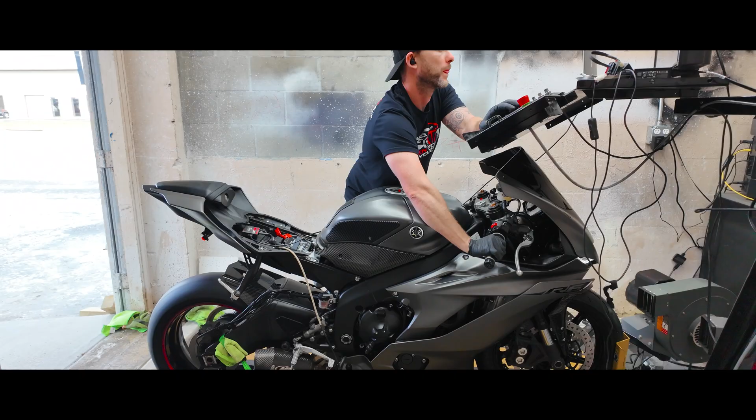Today we have a 2019 Yamaha R6. This bike came to us from another shop. I believe it has a full M4 system, and I'm pretty sure it's got an air filter. These bikes have a little restrictor in the air box, so more than likely they took it out. I'd be very surprised if they haven't already.

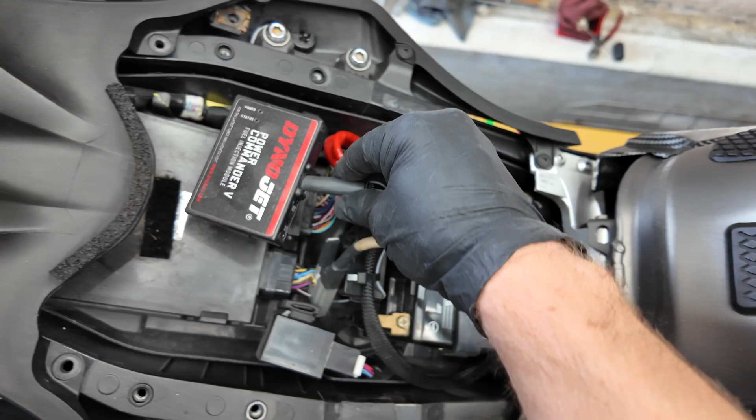So what we're gonna do today: we're gonna dyno it, flash it, and tune it. It's got a Power Commander 5 sitting up here — I just have it out of the way for the pickup. I don't know what the Power Commander 5 mapping looks like inside, I haven't looked at it yet. So we're gonna flash the ECU and tweak this Power Commander, kind of dial them in at the same time.

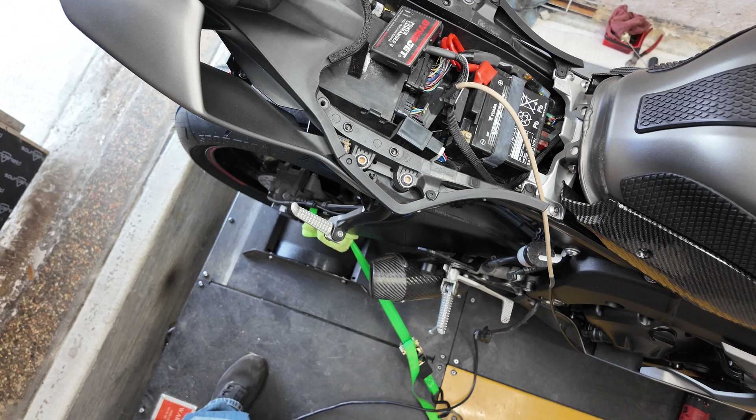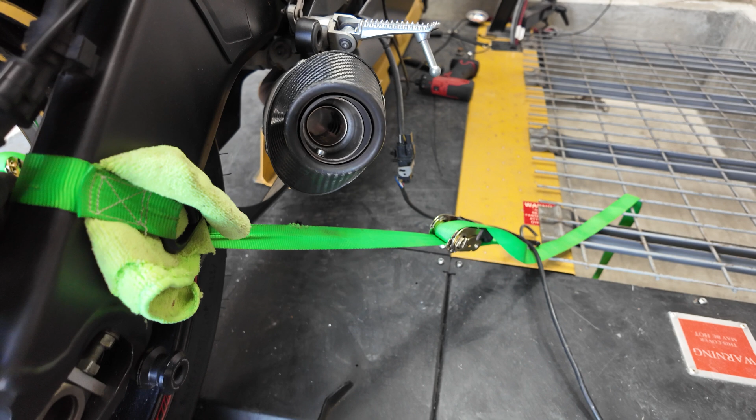This is going to be a street bike and an occasional track bike out on road course racing. The one thing I wanted to specifically point out to you guys — and I've made videos in the past about it — this bike has a restrictor in it, or what they call decibel killers, or silencers, whatever you want to call it. They do this because at our local road course tracks, especially Jennings, they're very strict about decibel readings and how loud the bikes are.

So we've already got the bike all warmed up. What I'm gonna do is run the bike and put a flash in it, so it'll at least have a nice base flash. With all the restrictions taken out, it'll be kind of close. We're gonna show you guys the top end and the power band, and then we'll take this silencer, decibel killer, whatever you want to call it, out, and rerun the bike to show you guys how much power is being left on the table and how different the tune is with and without the silencer in there.

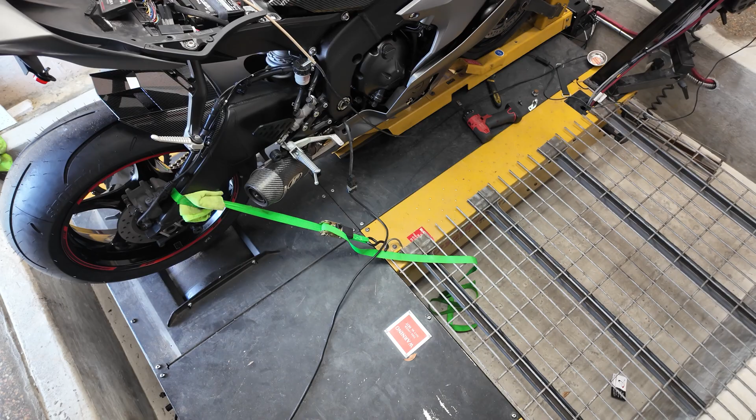So that's gonna be my target today. I always try to show you guys something a little new on all these bikes, so that's what we're gonna try to target and show you guys how this all works. With that, let's go ahead and fire up the bike and do some baselines.

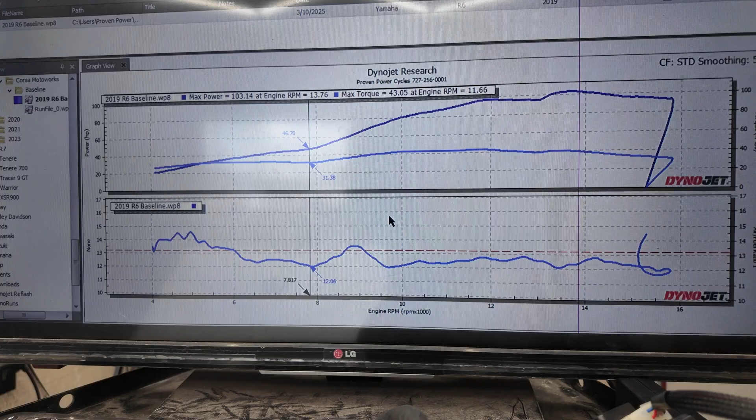All right guys, so we just got done putting a base map into the R6 here. We have the baseline: it is at 103 horsepower with 43 pound-foot of torque, which isn't horrible, but also not that great. It's pretty fat all throughout the power band — 12.5, 12.1, 12.5, 12.1.

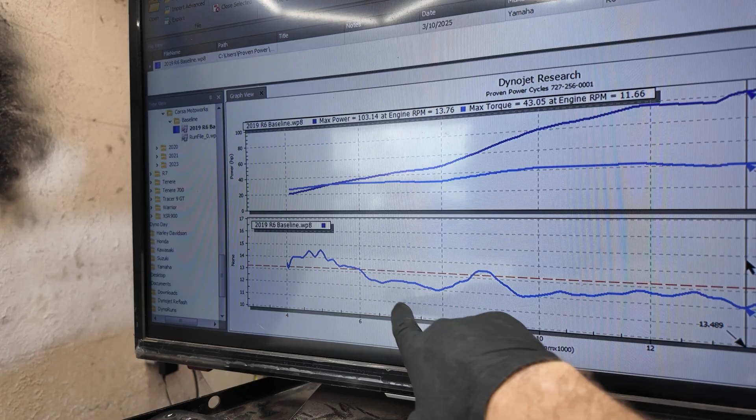If you notice here, it's a little lean in one spot, and there's enrichment here — it goes a little rich. It goes really rich at 8,000 RPM, then shoots up, then comes back down. So it's kind of all over the place with the fuel mapping, not anywhere nice. I'll be honest with you, it's not the best fuel map.

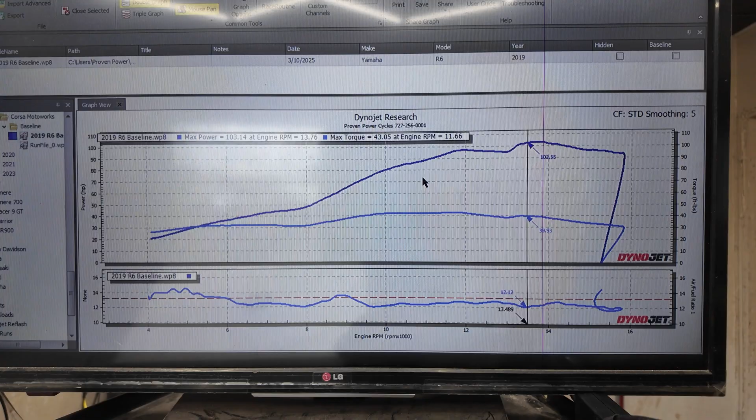So we de-restricted it, disabled some of the check engine light stuff, some of the emission sensor stuff, and we're gonna go from there.

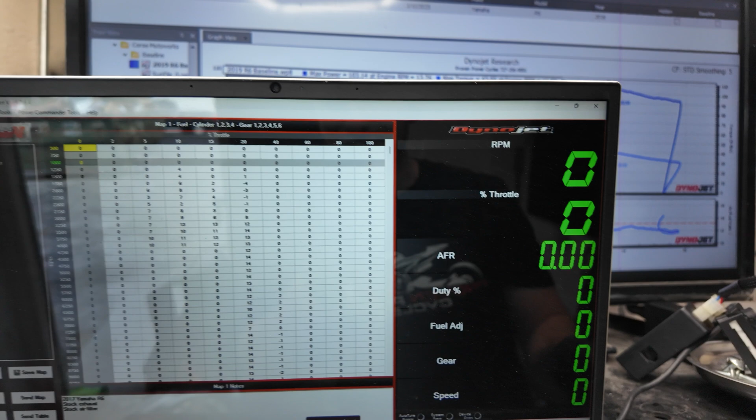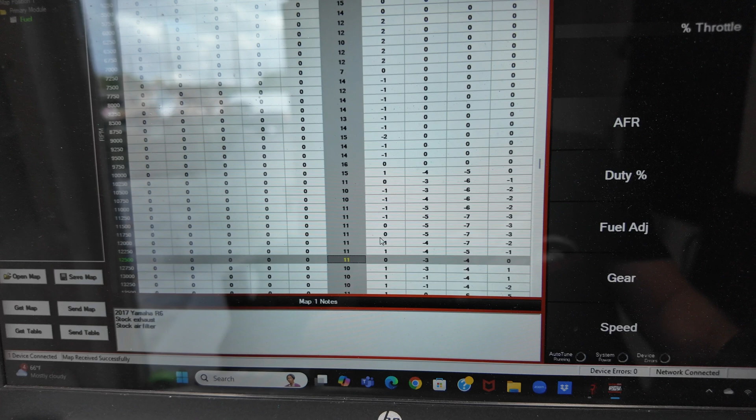So like I said, we pulled up the Power Commander map, and honestly it looks like your standard Power Commander 5 map with just a handful of changes. This one's kind of odd — it looks like somebody messed with the 20% fuel column, there's a bunch of numbers down here. And then we have a lot of fuel actually being pulled out up here at the top end. It's a considerable amount. We're gonna see what happens here.

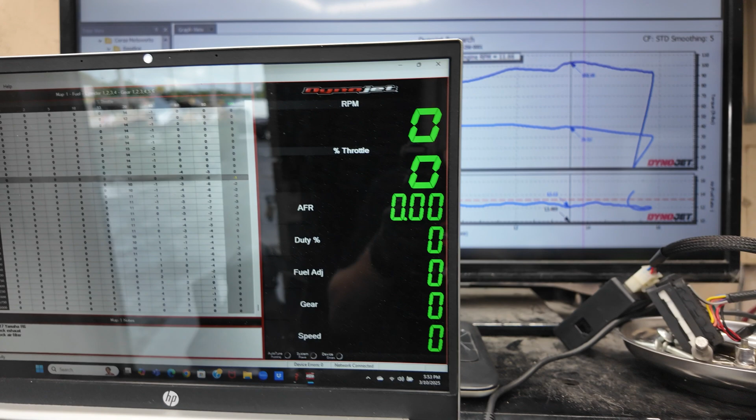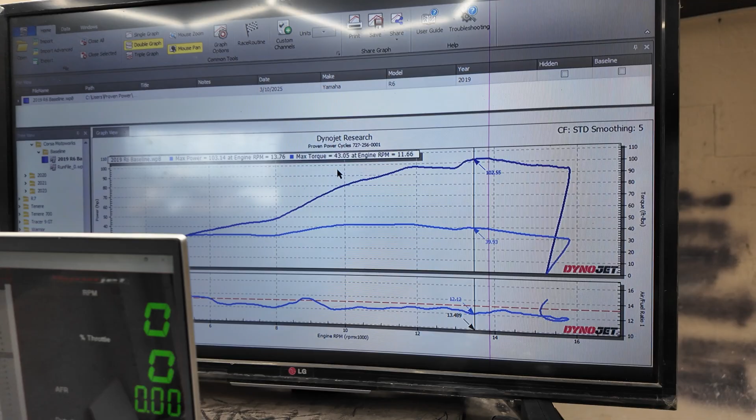We're gonna baseline it again now that this is flashed, and then I'll do a quick little touch-up in the Power Commander to get the AFRs in the proper range, or at least close enough. Then we're gonna go over the numbers again, take the silencer out, and go from there. Then we'll get you guys some final numbers.

All right guys, so we just got done pulling the silencer out. The bike is still pretty warm, so we're gonna kick the fans back on and go back over it.

Real quickly we'll analyze the numbers here. So we only did a couple of passes, just a handful, because I just wanted to get the AFRs somewhat close.

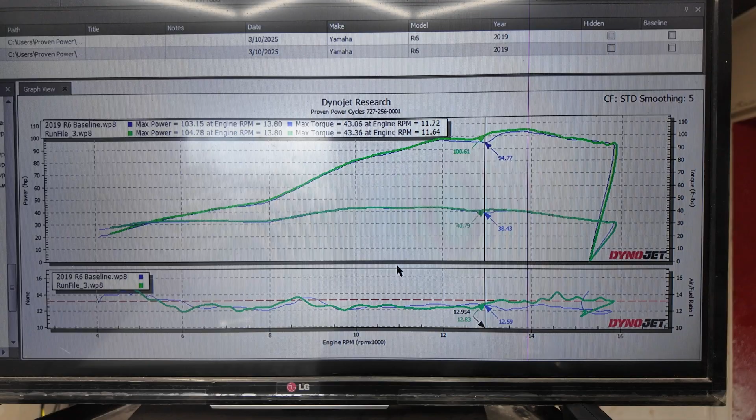We had a little disturbance here. I think it's more the sensor freaking out than the actual AFR jumping like that, because we had a few runs that were real similar. I just don't like beating on the bikes with the silencers too much in the dyno room. It doesn't have enough airflow like if you're on the open road, so I don't want to cause any damage to the motor or anything.

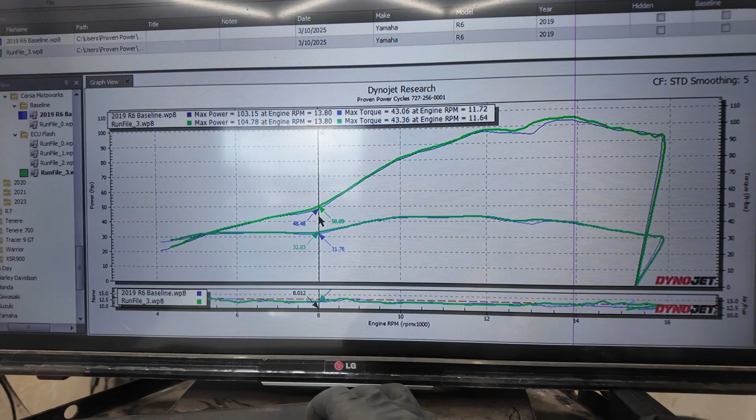So we only picked up a couple horsepower down low, and if you want to get picky, we picked up about 6 wheel up top here, and that was about it. The rest of it looks the same.

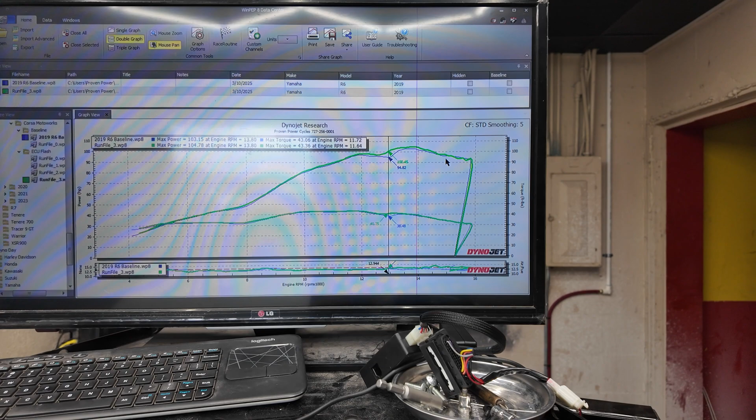So honestly, he might have already had a flash on this bike. We just got done talking to the shop it came from, and they said they don't know the history of the bike. The new owner just purchased it, so he doesn't really know what's been done to it. It might have already been flashed, because usually when you de-restrict it up top here, you get a bigger jump than this.

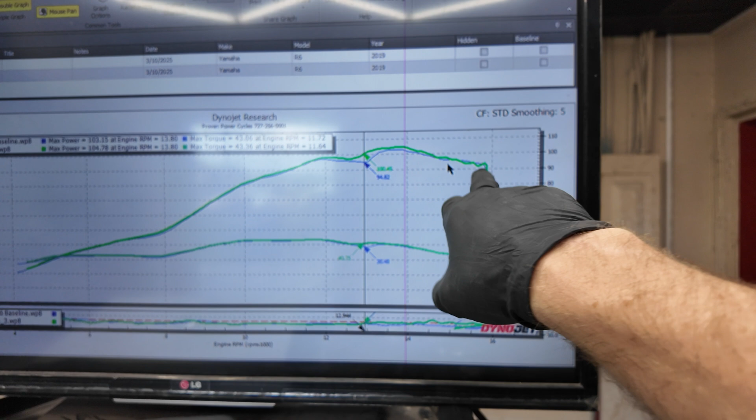So either A, the silencer is pulling out more power than I think, or B, this bike has already been flashed and de-restricted and all that. But with that, let's run it without the silencer and see what happens.

We got that 2019 R6 all wrapped up, and the shop came and picked it up tonight. They're going to test it tomorrow, go out for a ride, and make sure all the issues are resolved.

After speaking with them during the pickup, they told me it had choppy on-off throttle, real twitchy, and another issue - when it got to higher RPM it felt a little off. I can't remember exactly everything, but the major issue he said was around 8 to 10,000 RPM - when rolling into that throttle it had this bucking sensation.

Everything I tested on the dyno, I didn't feel it or notice it, but then again I didn't really ride it around too much with that other map. I'm trying to be a little quicker with my stuff now, so I just cut to the chase, put my map in, and say let's get to work, and see if they're happy with the results.

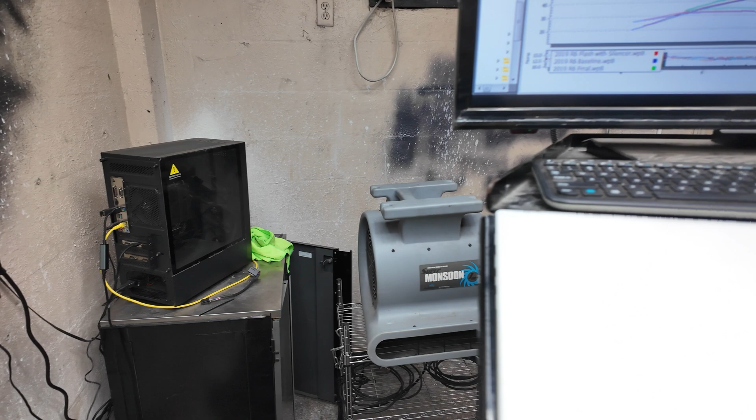The other kicker is we don't have a good proper airflow. Being in a small room now, we don't have a lot of airflow like we did at the old location where it was an open atmosphere. So we're drawing a lot of hot air back into the bike whenever we're running them. Our numbers lately have been a little on the lower end, but that's okay.

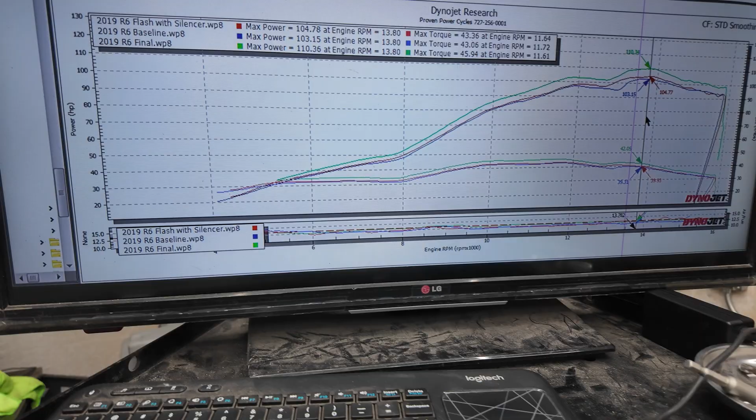Not stressing it. What we're gonna do is fix the induction. We're gonna get a fresh air fan here, cut a hole in the wall right there to get nice fresh air coming in from outside, and have a nice exhaust fan out the back.

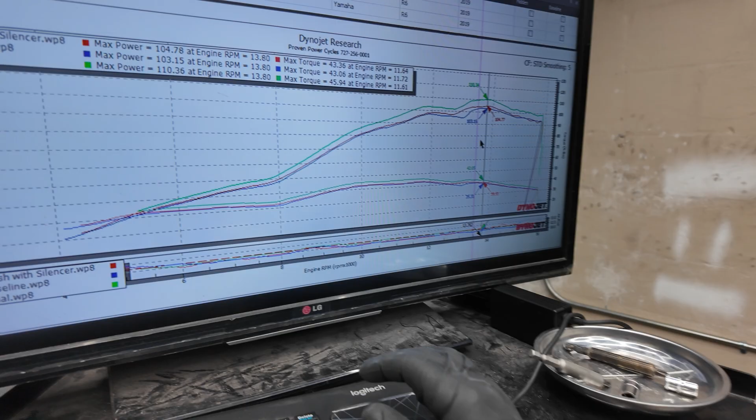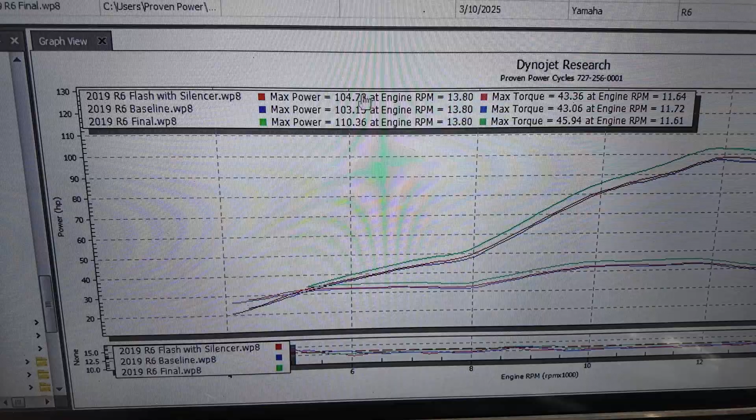But anyways, let's go over the final numbers here and wrap this up. It came in making 103 horsepower with 43 pound-foot of torque on the baseline, shown here in blue. Then we flashed it with the silencer in, and you guys saw this, we bumped it up to 104 with 43.

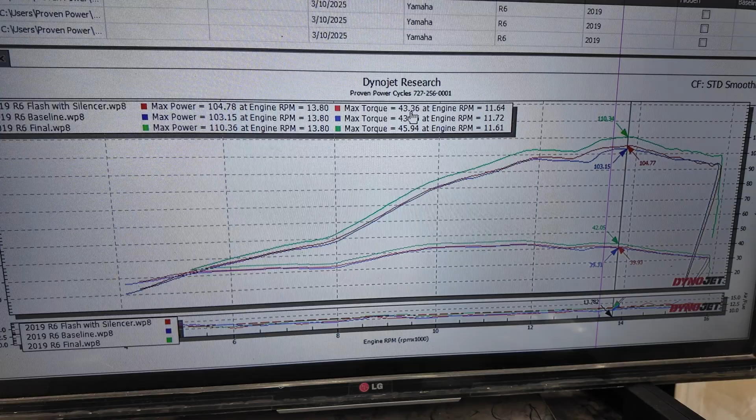Like I said earlier, I believe this bike did have a flash already in it, and the tech I spoke to said the fans kicked on early, around low 200. So I'm assuming it did have a flash. Also, based on the rest of this mapping, it looks really similar to a flash ECU already.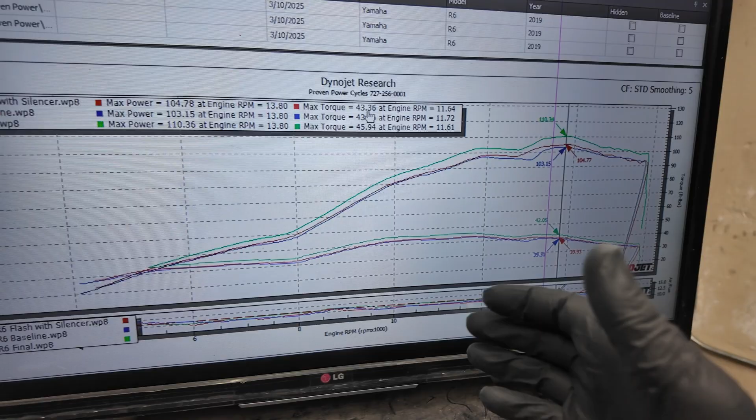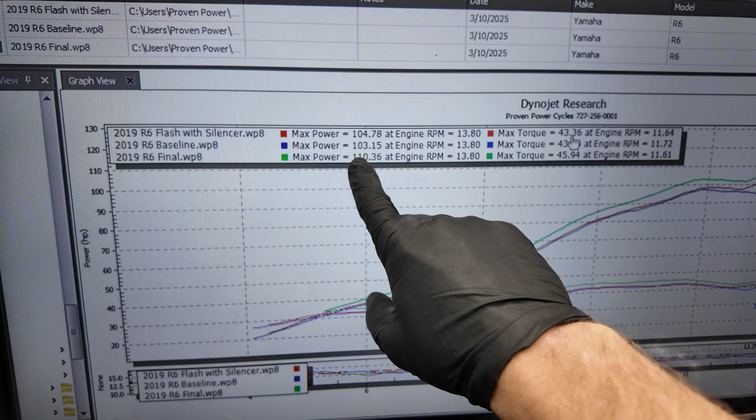Then with the silencer pulled, we got it all the way up to 110 with 45, almost 46 pound-foot of torque. So all in all, we picked up 7 wheel horsepower peak versus peak, and an additional about 2.5 pound-foot of torque, peak versus peak.

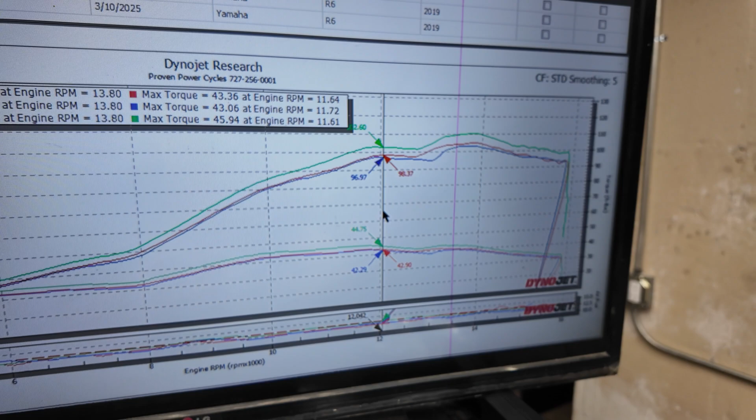But if you actually go through some of this, all in all we're gaining anywhere from 96.4... we picked up about 6 wheel here. So we're around that 6% threshold.

So guys, just removing your silencer, your DB killer, whatever you want to call it, just removing that, he picked up 6% on his power, okay? Your butt dyno is going to notice that. That's a very noticeable difference, a massive difference, okay.

So for those of you at the track, if you don't have to run a silencer, don't run it, as long as you're tuned to have it with it removed. In other words, make sure your tune is okay with the silencer out versus tuning it with the silencer in and then removing it. Don't do that, because then the bike's going to run lean. Get it tuned with the silencer removed, and then put the silencer in, unless you have to run that silencer — put it in after you've been tuned with it out.

That way it'll run a little fat, a little rich. That's okay, it's better than running lean. You don't want it to run lean — that's how you create massive issues in your engine, okay?

But all in all, man, pretty damn good compared to how he came in. Let's take off the middleman here and just compare the flash versus how it came in with the silencer removed. Even right here with the velocity stack transition, look at this — he's picking up 8 wheel horsepower, almost 9 wheel with that transition. And again, here's 10 wheel.

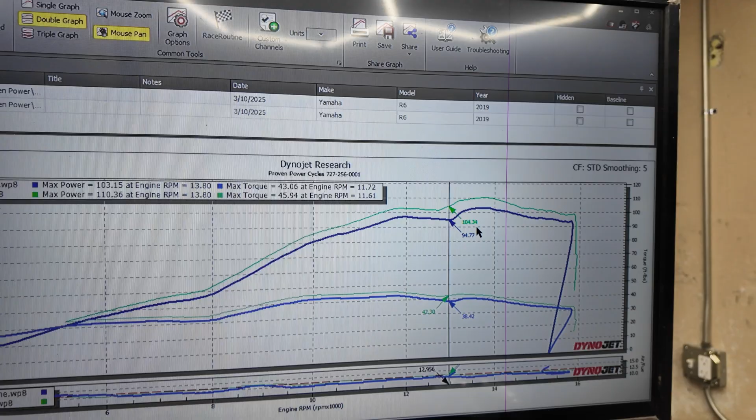Again, this is flash versus flash, but with the silencer removed, compared to how the bike came in. But all in all, picked up damn good power, like I said. Pretty happy all in all.

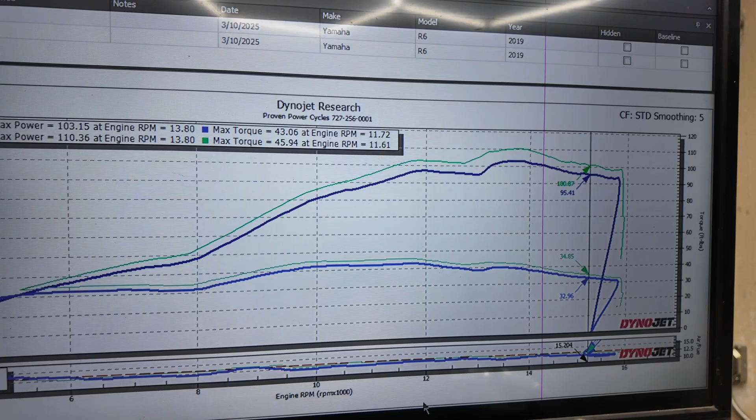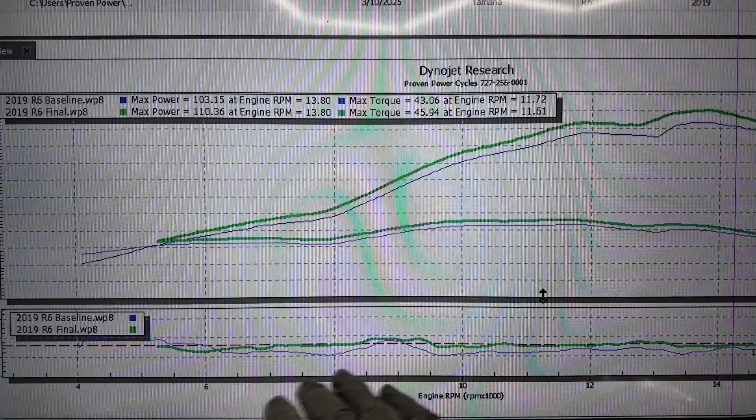Got a good air fuel curve. We had a little issue here at 8,500, 8,700 or so — we're enriching this up, but on this particular pass it just ran a little lean again, not a big deal guys, during that transition it's not the end of the world. Again, we fatten it up, we always add a few extra percentage before they leave. But all in all, we're at good air fuel, pretty straight line all the way across. Very happy with it, not gonna stress it.